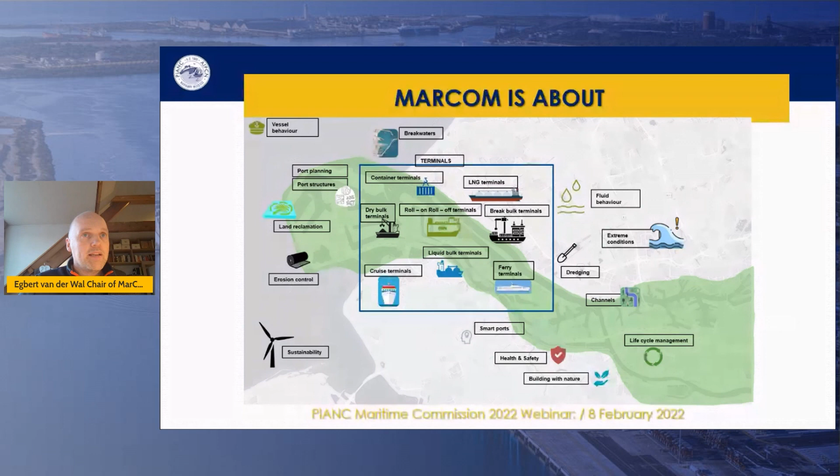And that's also something that we are working on from the Maritime Commission itself, but also with the members of MarCom. We have around 55 members from 25 countries across the globe. What I feel most proud of is that the level of expertise, not only within the Maritime Commission itself but also within the working groups, is phenomenal. There are people working on tunnels in Norway, on huge reclamation projects, and everything in between.

MarCom cooperates a lot with other international organizations like IMO, the International Association for Ports and Harbors, but the newest one is OCIMF, with whom we share our knowledge, but they also give input into our new guidelines. I think that strengthens the cooperation but also ensures that everything that we make is fit for purpose.

If I then look a little bit back into the latest reports which we have made, it's about renewables and energy efficiency for maritime ports, the design principles for dry bulk marine terminals in 2019, ports on greenfield sites, berthing velocities, which Alfred is going to talk about, and the planning for automation of container terminals, which Ashebir is going to talk about.

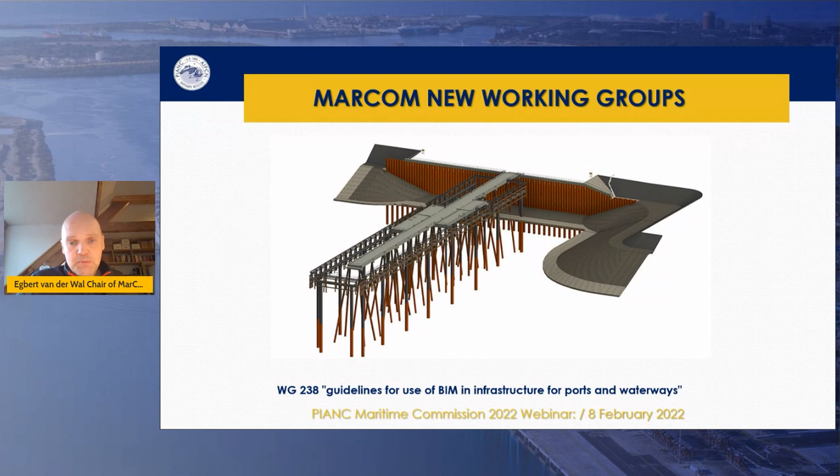The guidelines for the use of BIM, building information modeling, in infrastructure for ports and waterways - also something which is somewhat new, but also already existing. There are a lot of international guidelines available, but how to use that and what the gain is by using BIM in your projects, that's something we just kicked off now. I have very high hopes for this really nice report.

Mitigation of tsunami disasters in ports, also a topic which is still evolving, and we are trying to see if we can enhance our guidelines to give expert advice.

The one I'm very proud of, also because it's one of the working groups that was being done by our late colleague from Australia, is the guidance for ports in small island countries. This is the first guideline which we are not making only by ourselves, but including the World Bank and also the Asian Pacific Investment Fund on infrastructure - a really good opportunity to ensure that the smaller ports, small islands, can use our information.

Then the last thing I want to say before we kick off the rest is that we have two new topics coming on. So if you're interested in sharing your information, sharing your knowledge, it's always good to have a little bit of an idea of what's coming up.

The two things at the moment we are planning from the Maritime Commission: a guideline for the planning and implementation of shore power connections. There's a lot at the moment already existing in different forms, but we still see that it's a struggle to get the right kind of project and get it done swiftly.

What is happening in the port or container terminal industry? They've been trying continuously from the inception to optimize all the processes, to find what they do better in the future. This has been happening for a long time, especially as the waterfront land becomes less and less available. Consolidation and densification require a lot of processes, similar to industrial systems.

So that's what automation is. And with that, as you can see with our iPhones, technology has improved significantly. Equipment, computers, terminal operating systems significantly improved. So these two aligned and made it cost-effective for operators or ports to implement automation. But we always have to understand the initial cost of automation is high. There is some benefit though, sometimes significant: improved productivity, lower labor cost, lower operating cost, and greater degree of safety and reliability.

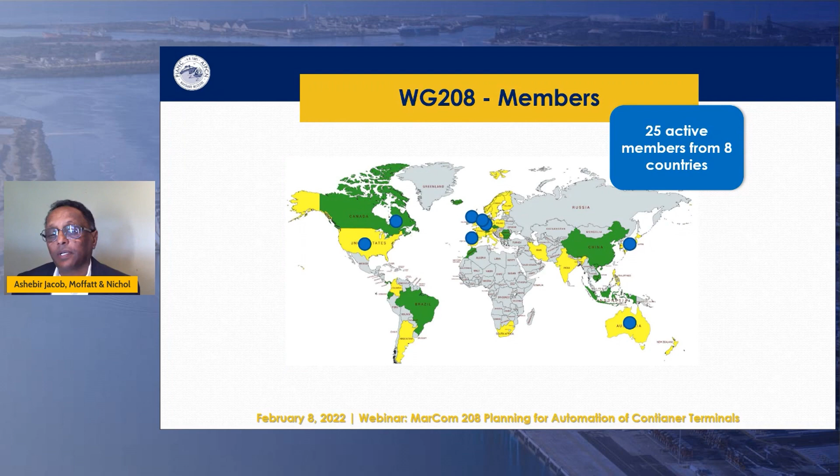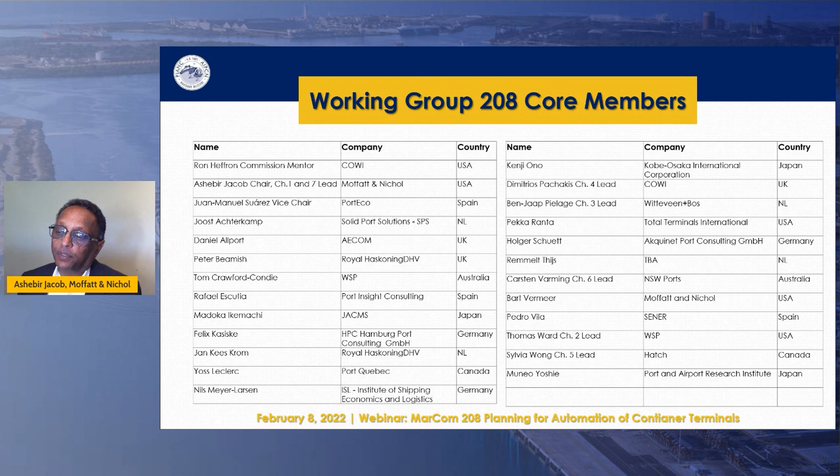The guideline focuses on the planning process of automated container terminals. In our team, we had 25 active, dedicated, smart, and experienced members from 8 countries. But it didn't stop there - we had support from the industry as well. Here are the names first for the Working Group 208. Please, when you see them, thank them. They didn't get a penny to do this. They are highly experienced, busy people, but they were dedicated in providing and sharing information based on their experience.

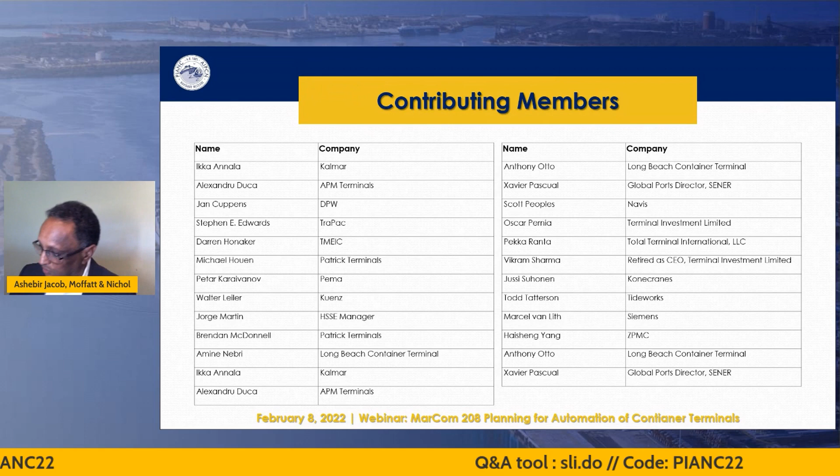Not only the core team, but we did get input from industry experts. Our goal was: if we publish this, it has to be acceptable, and we have to be able to get feedback if we're not doing it right from the industry - be it from the equipment side, automation, control systems, or TOS (terminal operating systems), terminal operators. Thank you for their contribution. We're comfortable that this is a good document.

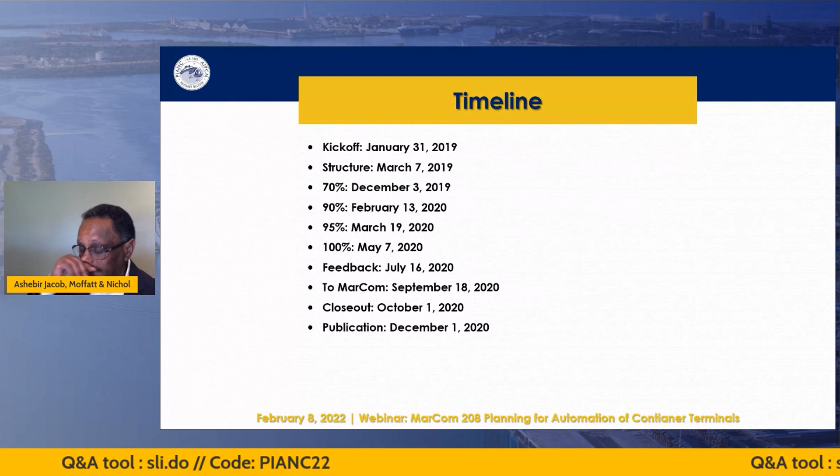And the reason I say they were really dedicated - it all happened during COVID shutdown. We had a few meetings before COVID, but mostly it was virtual. And imagine many different time zones - people were willing to get up at 2 a.m. in the morning, or stay up until 11 in the evening to attend these meetings and workshops, and were able to achieve this document quickly.

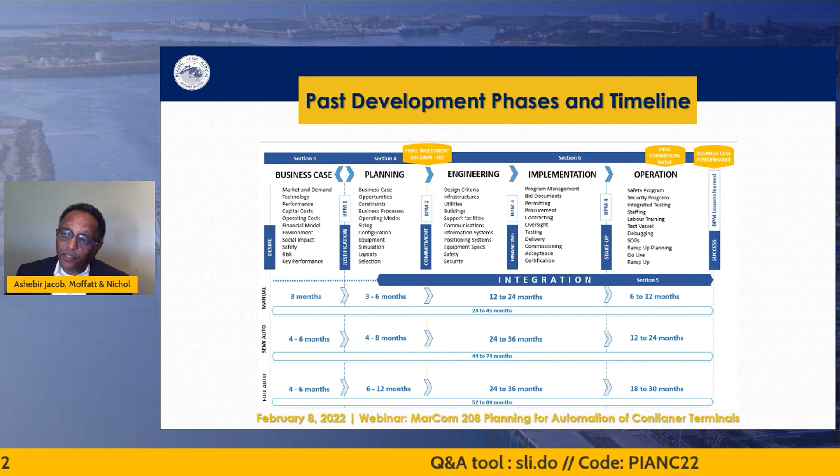So back to the document itself. The document defines the planning process in 6 or 7 major pieces. The first one is the business case - don't start planning until you define your business case. That is what tells you you've achieved a different level. Otherwise, if the business case is continuously changing, it has to be documented, and all the core team players have to understand it and know what they are implementing. So define it early, and then start the planning, continue to do the engineering, implementation, and operation. It goes even after operation, into continuous improvement.

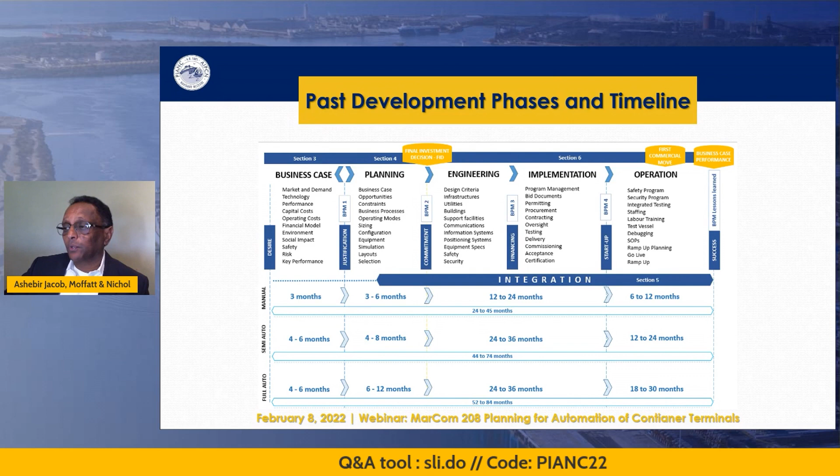But the key word here is integration. It starts from the beginning to the end, in an integrated way. You cannot do this in a silo - all the work has to be integrated from planning all the way to operation and continuous improvement.

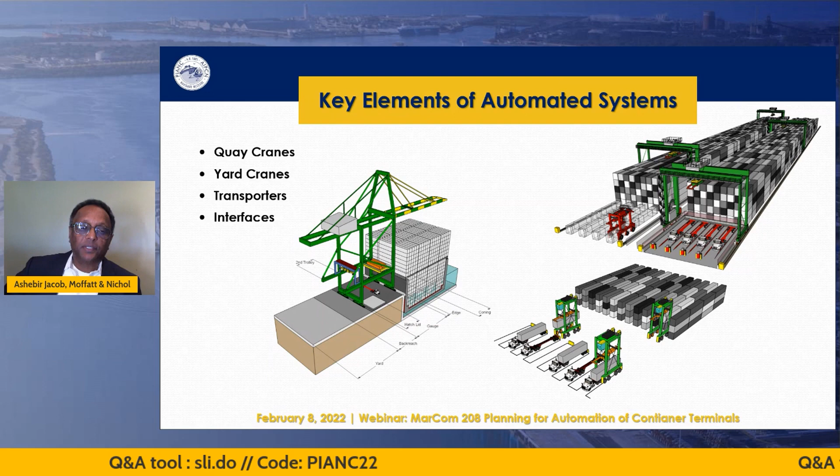So when we talk about automation, starting from the water side, we have the quay cranes, the horizontal transports, and the stacking cranes. I'll talk a little more in detail about each piece, but these are the pieces: receive and deliver to the water, receive and deliver to the gate and rail, and manage the stack and transport it from one system to another.

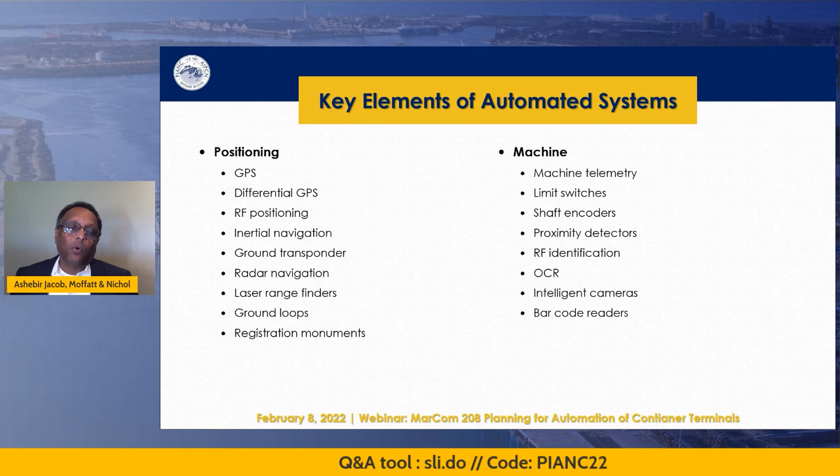But there are many other technologies that make it happen, be it GPS, or ground transponders. All this has to be there. Some of them are buried, some are in antennas, but all working together are what make an automated terminal function. So it's not only about the equipment, it is about the whole system working together.

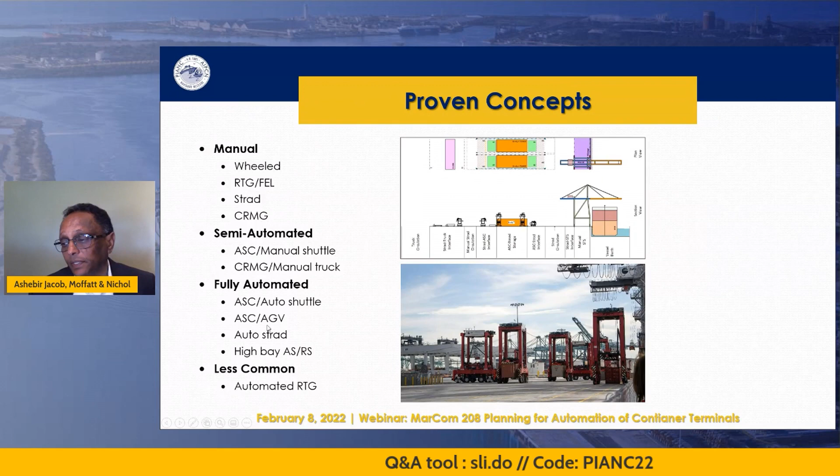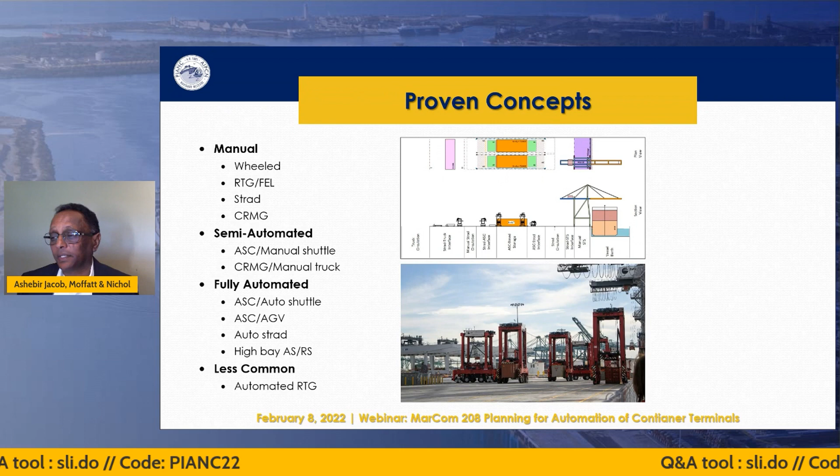Definitely the Autostrad is another machine that does transport and at the same time is used as stacking equipment. But the Autostrad is available both in auto and manned versions. Some companies are working hard to automate RTGs, but we haven't seen it yet in full service - so maybe someone will correct me later.

So always start with a business case. The business case starts with why are you building it, where is the market, where is the volume coming from, and how is it happening from day zero to year 20, 30, or 40, depending on what the design life is.

Then we go into the technology, the preferred technology, and what are we expecting in terms of productivity. What are we expecting in terms of transshipment - what percentage is it, is it 90% transshipment, or is it 50-50? All this has to be documented in a system so that it allows us to develop a system that works.

Most importantly, based on those, we have to know what our budget is in terms of capital cost, and what we're expecting in terms of OPEX or operational cost. We develop a financial model that can track the return on our investment. This is a living document, but it has to always be updated and have buy-in from owners, senior managers, and the core team implementing the system.

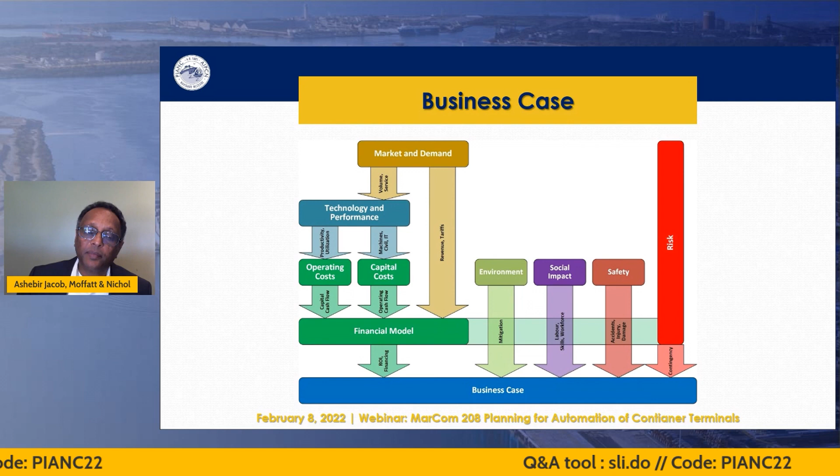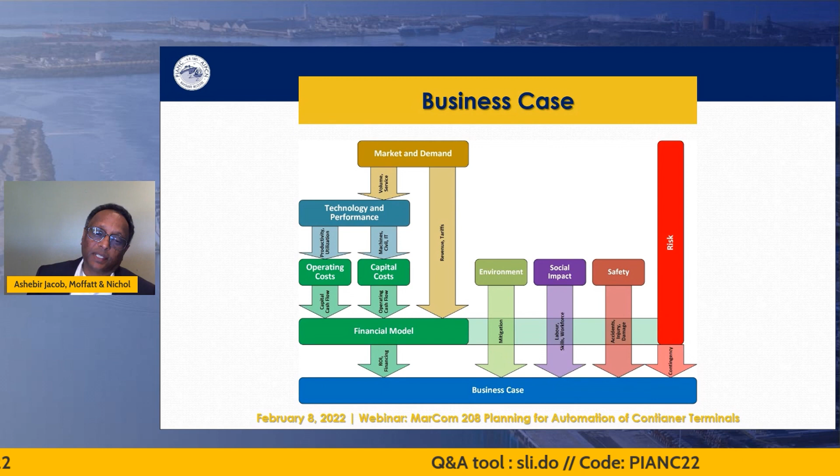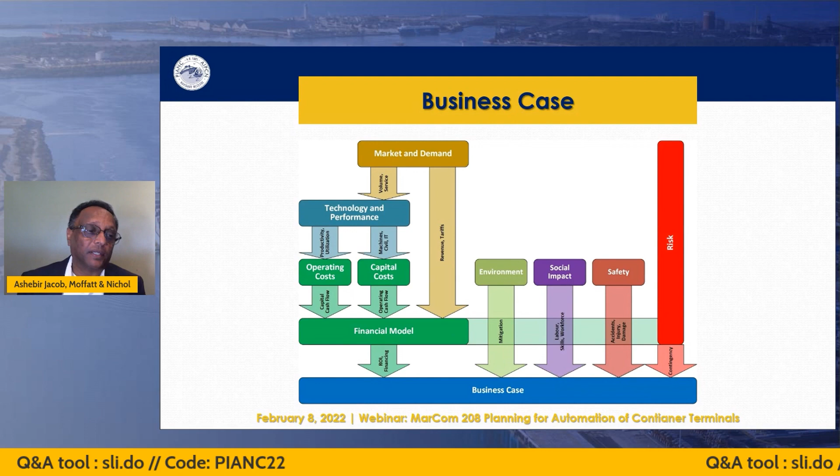But it's not only that - there are other drivers in the business case. We may be doing it because it's required to meet environmental requirements like zero emission, or for social impacts and safety - always assess your risk and come up with mitigation ahead of development. But sometimes automated terminals are developed for prestige or competition purposes. Those need to be defined as a business case for that specific terminal.

So the first thing we do in terminal planning is form a core team - this is really critical. At minimum, the core team should include a project director or manager responsible for all aspects of it, a member of operations, a member of equipment, a member of the infrastructure engineering team, finance, TOS, IT, and cyber security. All those are part of that core team, including a labor relations manager, because in many areas you have to comply with labor rules, and you have to understand the legal requirements and regulations. Having all those people working from beginning to end assures the success of the project.

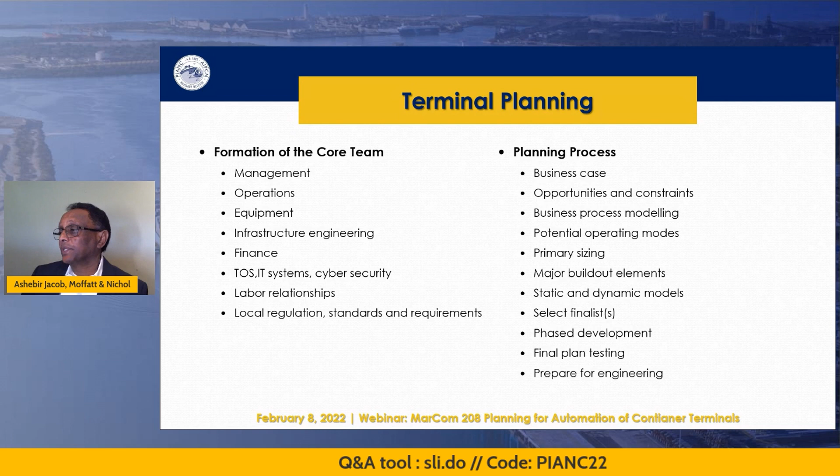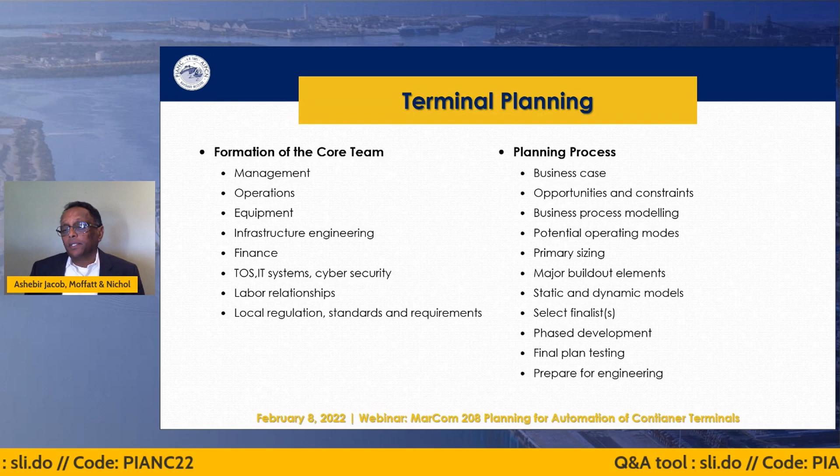In planning, we define the business case again, look at opportunities and constraints, look at the business, and develop a business process model. We look at potential operating modes - is it side-loaded, is it end-loaded, is it end-loaded parallel, is it a double cantilever? All of them have a purpose because of the shape of the terminal or the mix of transshipment, giving you a way of solving those problems and meeting your business case.

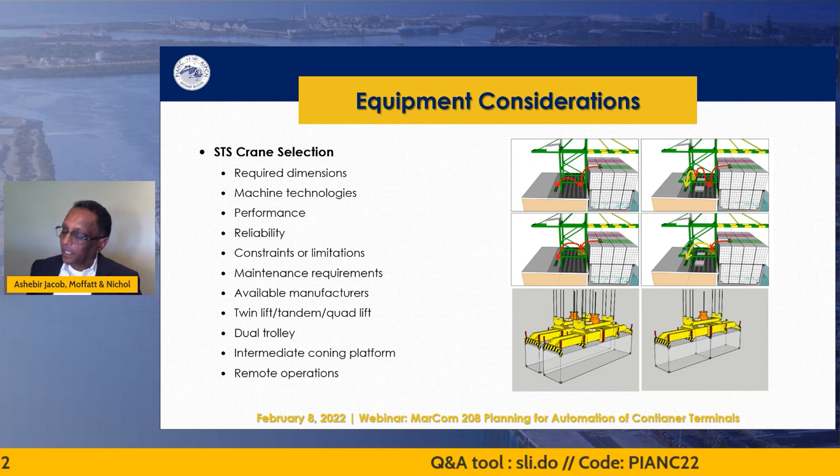So none of this equipment is off the shelf. Simply, STS used to be 100-foot gauge - you give them the outreach and backreach, and ZPMC will deliver. None of that is real anymore. It is highly technologically advanced and fit for that terminal's specific business case.

The performance specification has to be developed. Is it a single trolley, is it a double trolley, is it tandem or quad 20s? All those have to be defined. What is the span, what is the outreach, what is the height? Depending on the vessel design and the transfer to horizontal transport, so it is not off the shelf - please understand that.

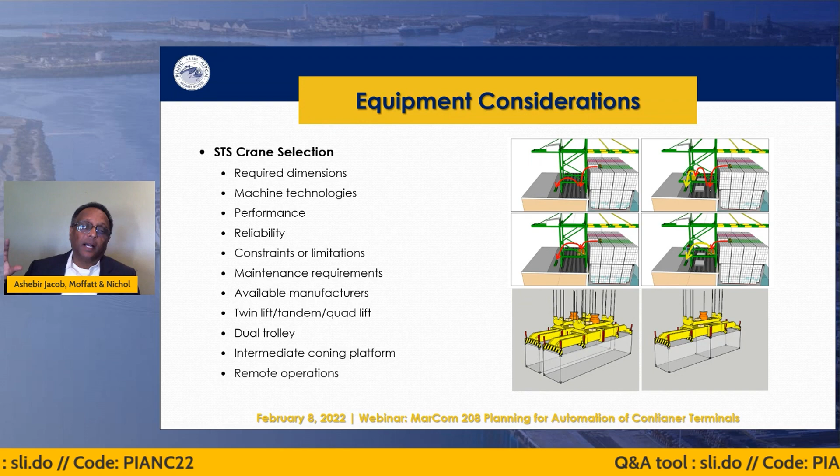Yard cranes - there are many yard cranes available. As I stated earlier, we have the ASC end-loaded. We have them parallel to the wharf, and perpendicular to the wharf, side-loaded. All those have been used and proven. We have horizontal transports that can interface with STS and ASCs, and we need to look at their reliability and performance. We have to develop a maneuvering space after selecting the equipment - that's why it's called integrated planning.

Based on the decision of what equipment we use, we have to develop appropriate space, and we assure this appropriate space by modeling it, creating a simulation model, a digital twin of the whole system, making sure we will achieve if we build it, because it is a really high cost.

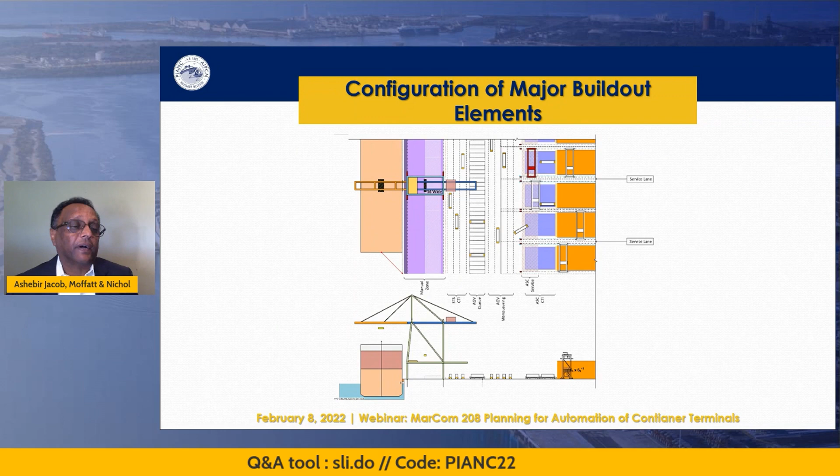We have to assure ourselves what we build will give us what we defined in our business case. Then even in the stacking area, the ASCs, we have to understand where it's going to be stacked, how it can be maintained safely. If we have two cranes, do we have a safe maintenance area so we can serve both ends using one crane? All this needs to be defined, drawn, and identified before we finally decide to buy the equipment and finalize the design.

So this is really important, and this is why we say it is an integrated planning all the way to delivery.

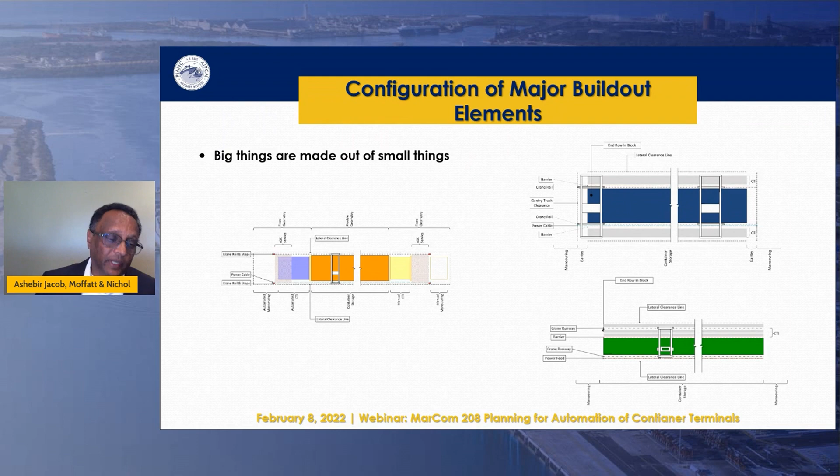Once we finish the planning, we look at other details. The most important is that we have to use the simulation tool, a digital twin of your facility, your sandbox that you can play with, and make sure it works. That is the closest, if done right, to building it. You don't want to build it and find all the problems. Therefore, you use a digital system to do that.

And then you can use emulation to make sure all the systems and technologies are integrated. You fool the systems by building it and thinking it is communicating with the real terminal facility, optimizing your tools, your control systems, all those. This digital twin emulation will stay there, and you can continue to use it as a training tool and others. So invest in it early on.

Phasing plans - you're not going to implement this in one shot. There are phases. And if it is a brownfield, it even becomes more complex and complicated. So understand those, mitigate those ahead of time.

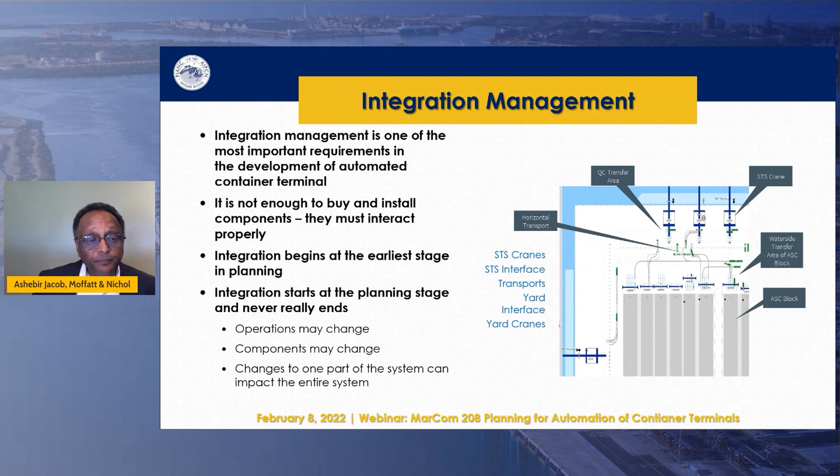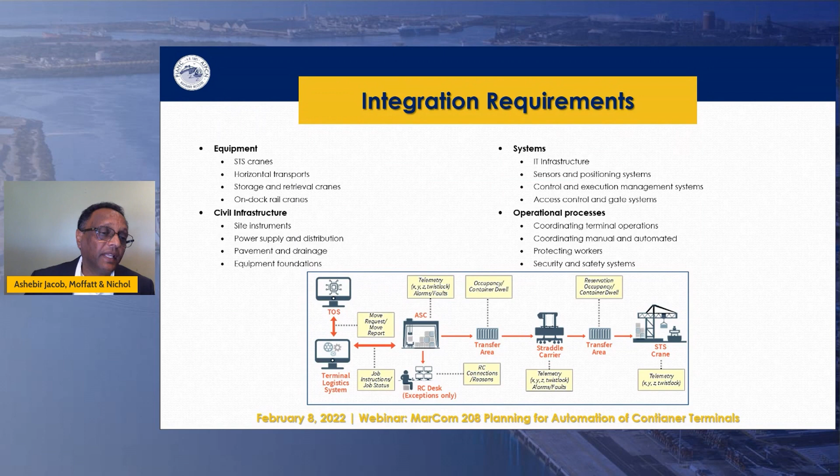So as you can see, there are so many systems that have to work together. You have removed the human brain, and some computers are taking over, running the terminal. These systems have to talk to each other precisely for all things to be done safely and efficiently. So think about it early on.

Then it goes into a detailed design. You have to design it - again, the importance of integration. If your equipment needs flat ground to store containers, flat crane rails, then you have to build it. The civil engineering has to accommodate operation, not operation trying to accommodate civil engineering. So you have to be able to drain it and still keep it flat.

And then you have to use the appropriate type of pavement in different areas, because where you have full automation and horizontal transport, getting there to do repair disrupts the operation significantly. So have a durable pavement system that requires almost zero maintenance.

This is just an example, but look at everything in a way that will allow the system to operate efficiently without disruption.

We have to understand the construction of this is completely different. We're not going to wait for the whole terminal to be fully constructed to bring equipment.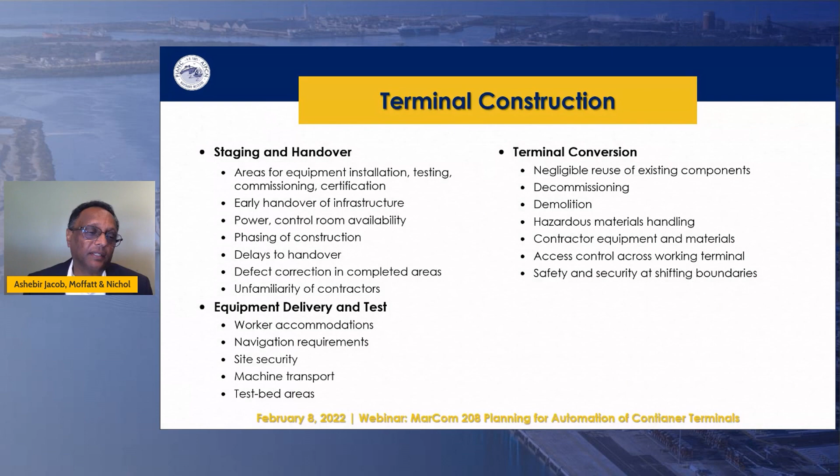Even in procurement, we have to think about all this, because what we specify for equipment or infrastructure has to be fully integrated with what we specify on both. And when we want them delivered, all those procurement documents have to be very integrated.

Finally, there are many ways of delivering these contracts. Multi-contract procurement, that's typical. But within that multi, there are certain things we can combine. There's this thing called turnkey, and some vendors try to promise this. My experience is this is bad, we are not there yet. Many of the problems in some new terminal developments come from believing the vendors, since they are owned by one, they can deliver. That's not correct. I'm sure many will disagree with me, but this is something we need to discuss more.

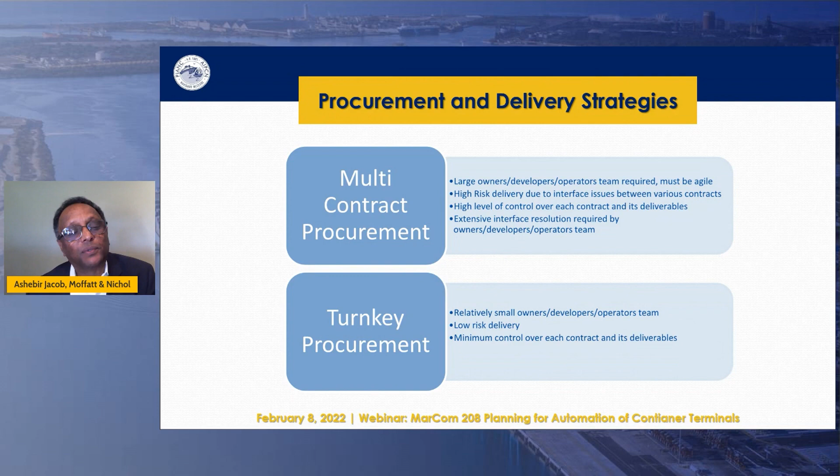So then, how do we hand over to operation? First, please understand after we go live, there is some time for ramp up. Do not forget that in your business case. The length of ramp up depends on how much planning we've done, how much testing we've done, what we've done previously helps us go from go-live into full business case productivity for the terminal.

But always remember, it's not robots running this. There are people who have to run it. Always remember to train them early on. Use the commissioning phase, the testing phase, to train your labor pool.

Always start to understand the business continuity. Think about the worst scenario and how you will mitigate that ahead of time.

And then definitely safety, and especially when you're dealing with technology, cybersecurity becomes important. Safety and security are key pieces, have experts in your team to look at those, because one casualty, one problem will shut down your terminal. But not only that, you want it to move safely, you need to protect your human resources. So make sure you go through independent reviewers looking at your safety system, especially where there are man and machine interfaces.

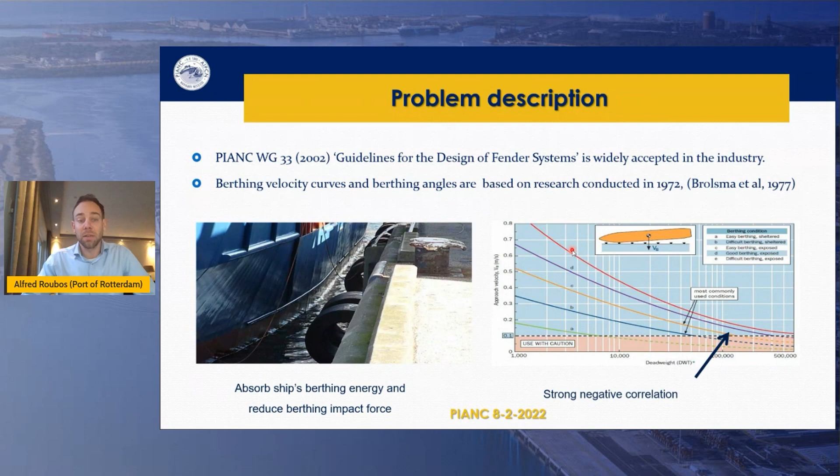It's also influenced by the navigation conditions. This line A represents very sheltered conditions, such as in Port of Rotterdam, whereas this is more exposed conditions subject to big waves and currents. Professor Ueda from Japan already showed that about 85% of the uncertainty in the berthing velocity largely influences the uncertainty in the kinetic energy, also because the velocity is squared. So this is one of the most important design variables in fender design.

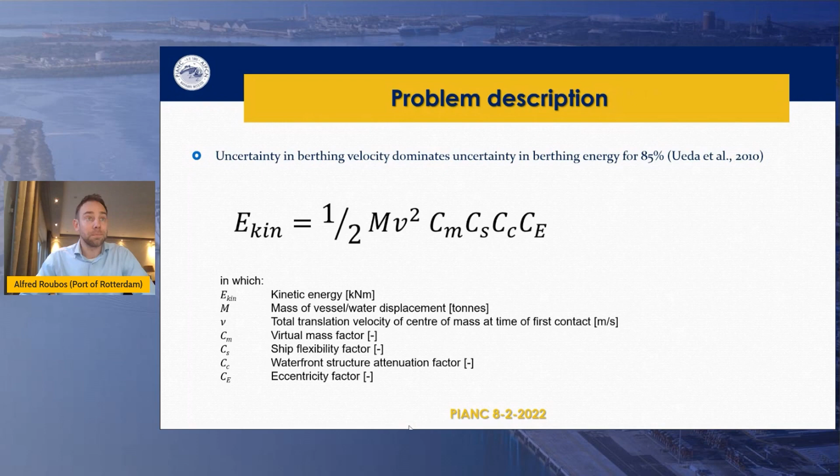That's the reason why PIANC 145 was tasked to collect data on berthing velocity, because we had a lack of data for about 45 years. Ships like the Ever Given are not included in the data set used during the 70s. So we collected a great deal of data, more than 2,000 berthing records from all over the world. 14 different ports in 7 different countries provided us with data, and our working group mainly focused on the data of the larger seagoing vessels.

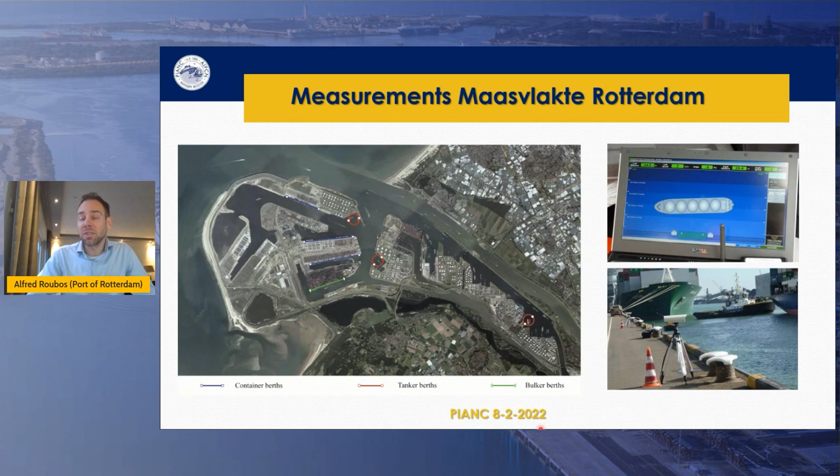Personally, I looked mainly into the data of the northwest part of Europe - Rotterdam, Wilhelmshaven, and Bremerhaven. You see a picture of the port of Rotterdam. We sent a student into the port with 2 mobile lasers, and he was basically shooting at the parallel body length of the vessel. During the stormy season in 2011, we collected 300 measurements of the big container vessels in the port. But that was the easiest part of the analysis.

We were also interested in what aspects influence the berthing velocity. So we made a big database, including wave conditions, currents, type of fenders, type of marine structures, occupancy of the berth, whether tugs were used or not, type of thrusters, whether the thrusters were used - to check what variables influence the berthing velocity.

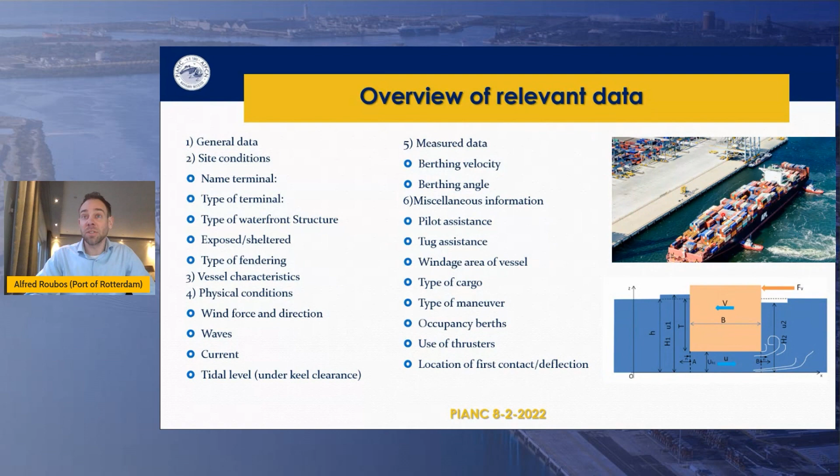Typically in Rotterdam you see this type of approach: the vessel is stopped like 30 or 20 meters in front of the fenders, and then it's gently pushed towards the marine structure. So a very controlled parallel landing procedure.

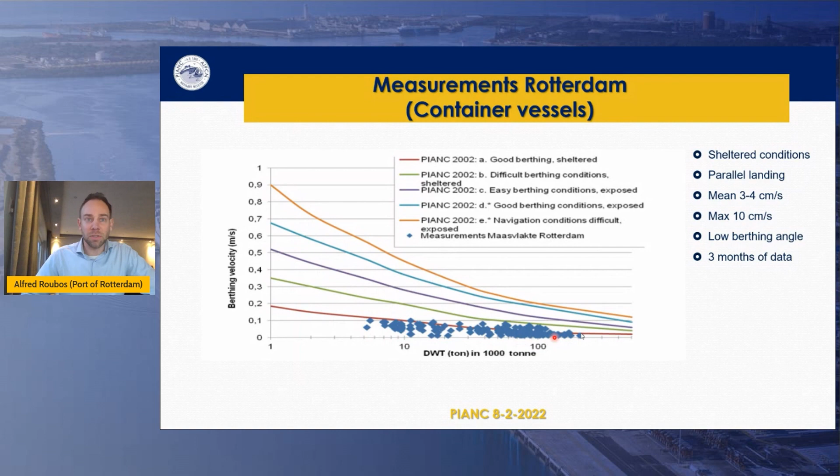You see the data collected in Rotterdam during the 3 months within the stormy season. The correlation is a little bit lower compared to vessel size, compared to the PIANC guidelines. Conditions in Rotterdam are quite sheltered. Mean velocities were about 3 to 4 centimeters per second, and the maximum velocity measured was about 10 centimeters per second. We also measured quite low berthing angles. This is only 3 months of data. So the Ever Given, for instance, the big container vessels are in this range, then we have the post-Panamax, new Panamax vessels, and the small feeders and coasters are in this area - so the small container vessels, and here you have the big container vessels.

We used this data set within 145, and then we did all kinds of statistical analysis, and predicted already higher values than 20 centimeters per second. Because the Port of Bremerhaven is still measuring the velocities, they provided us with a new data set in 2018, and this data set already included a higher velocity of 26 centimeters per second. I'll show it in a moment. It's also worth mentioning that the berthing angle at the moment of impact in Bremerhaven was generally always between 0 and 1 degree - I'll come back to that later on. So now we used about 8 years of data, and I think right now they have about 11 years of data of the berthing velocity in Bremerhaven - a very big data set.

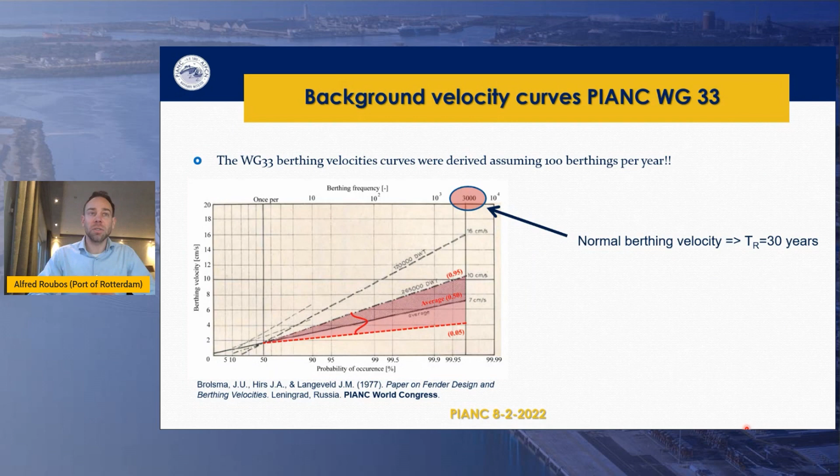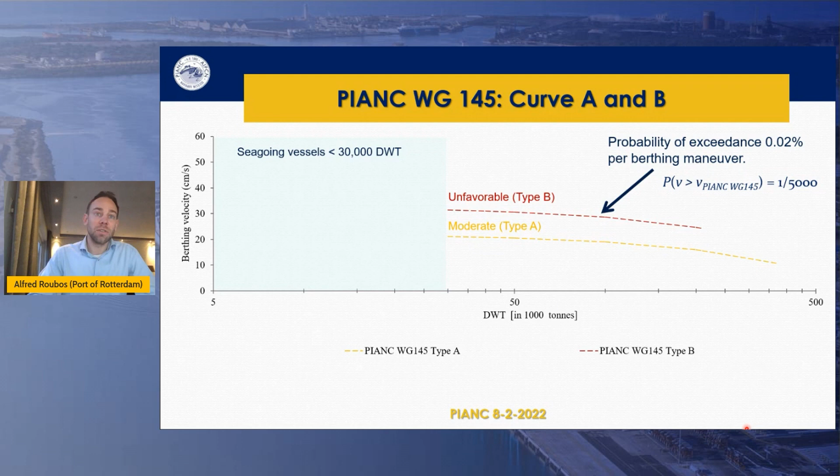Joko Brolsma, who developed the guidelines in the existing PIANC guideline, also did some extreme value theory. We're not looking for the mean berthing velocity, we're looking for extreme berthing velocities which might occur during the service life. So we did a similar analysis, also using extreme value theory in the PIANC committee, and two types of data sets were developed. In the guidelines, called type A and type B data, which basically represent moderate and unfavorable navigation conditions. These curves have a kind of probability of exceedance, so these are extreme velocities, and you see the data set below the curves.

We had a big discussion going on - is the data analysis okay? Because first, during 2014, we didn't measure these extreme velocities, but in the bigger data set of Bremerhaven you can actually see that one of the biggest container vessels in the world, one of the Maersk E-class container vessels, actually berthed with 26 centimeters per second - much higher than the values presently in use. But this gives us much more confidence about the data analysis that was performed, and that these values do occur in practice.

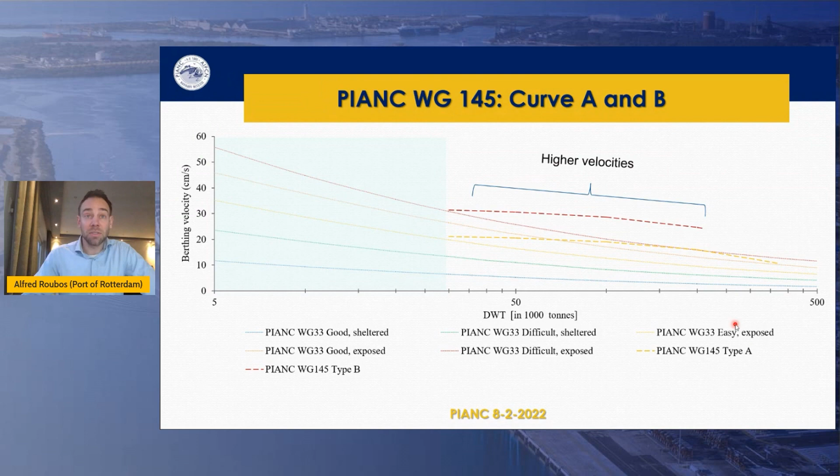So we found a bit higher velocities compared to the velocities that are currently in the guideline, especially for the larger seagoing vessels. And this will introduce a lot of discussion, so I'll come back to that later.

But first, let me summarize the main findings of our working group. We didn't find this strong relation between vessel size and berthing velocity, as was proposed in the previous working group. And we didn't find any evidence that berthing velocity is directly influenced by the type of marine structure, type of fender, or underkeel clearance. We didn't see a relation with the number of tugs.

No direct relation with environmental factors such as wind loads acting on the vessel, or currents. And the main reason why we didn't find these correlations is because they changed the berthing policy. So the pilots, for instance, order an extra tug when conditions get worse, and maybe sailing through the port channels is more critical than the final landing procedure. And then they have probably additional capacity left, so they are more in control.

So during stormy conditions, we sometimes saw lower velocities compared to normal daily conditions. That's because the pilots and the captains are more aware of the extreme conditions, for instance, and they take that into account in the berthing policy.

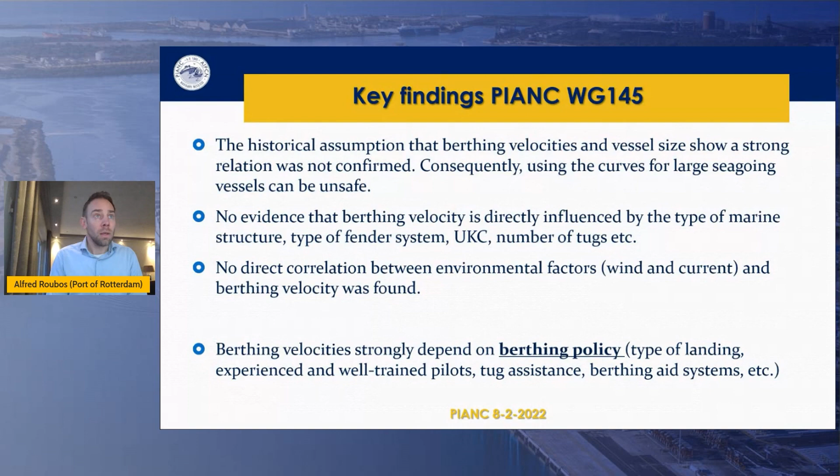So from PIANC MarCom, they were asking, well, these high velocities - is there a trend break, or do we need to double the fender size? We added a disclaimer to the Working Group 145 report, saying please be careful using the higher velocities in combination with the existing PIANC guideline, because we also have a lot of new insight that needs to be included in the new PIANC working group we are working on right now, the Working Group 211.

I'll discuss some new insights with you today, and we can discuss it further within the breakout sessions. So at first, we recommend using local or site-specific information rather than these general curves in the PIANC guideline. And if you have a berthing aid system or a shore-based docking system, maybe there are berthing speed limits which you can take into account in the design.

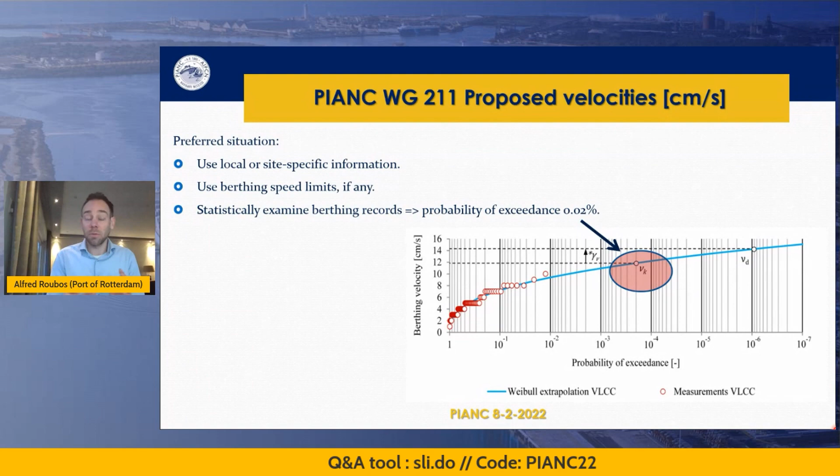Or if you have a big data set like Rotterdam, Bremerhaven, and other ports in Japan, then you can use this data to determine your own berthing velocity. But there are, of course, a lot of situations where you don't have data available or local information. Then we recommend in the PIANC guideline - it's just a conceptual table - we recommend to use these values.

So in contrast to PIANC Working Group 145, we added an additional column with recommendations for berthing velocity for very favorable navigation conditions. And these recommendations are based on the type A and type B berths that were presented before. But then we still end up with these high velocities for the larger seagoing vessels, and this might lead to bigger fenders.

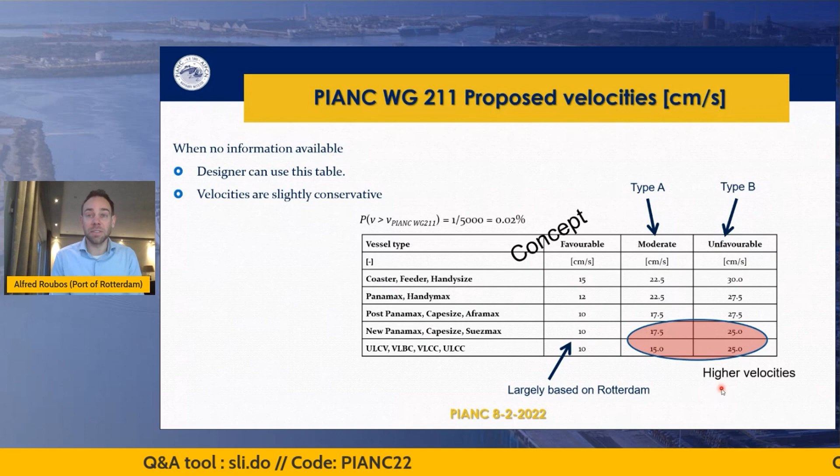But there are some things that we need to take into account before we conclude that. We also looked into the reliability of the fender system by performing a full probabilistic assessment within Delft University, to check what are the variables that influence the reliability of the fenders. I don't think I have time to discuss it in detail, but I will highlight some of the things that we found.

Of course, when you are designing a berth, this can facilitate small and large vessels, or empty or fully laden vessels. So there could be a variation in the displacement tonnage of the vessel, which can be taken into account in the reliability analysis.

Another thing we found is that recommendations for berthing frequency are lacking in the existing guideline. So some berths have only one or two vessels per year, whereas, for instance, public ferry terminals in Australia have 25,000 vessels per year.

That's completely different compared to what Brolsma assumed in the velocity curves in the existing guideline. So you can change the berthing frequency if you want, and this can really influence the safety factors we need to include in the guideline.

And also, if pilots are on board, then the probability that a high velocity will occur is much lower. So pilots generally have a positive impact on fender design.

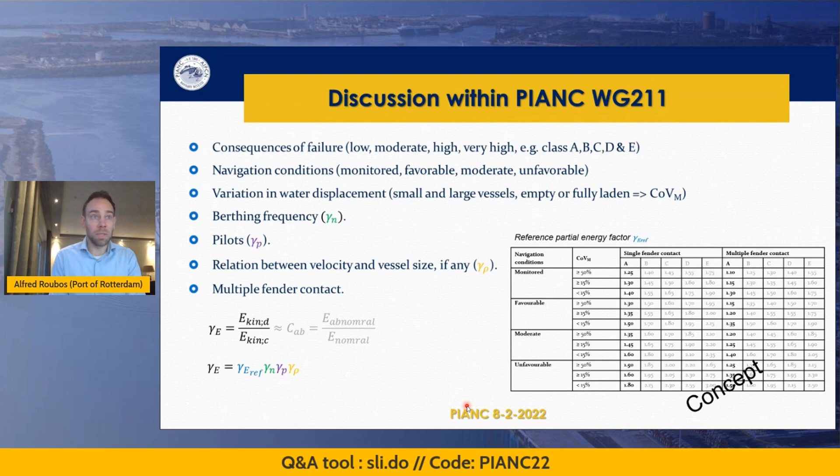So generally we design for single fender contact at the moment. So one fender absorbs all the energy, and then the berthing angle is not so relevant. So all the uncertainty within the design of the fenders is related to the uncertainty in the berthing velocity.

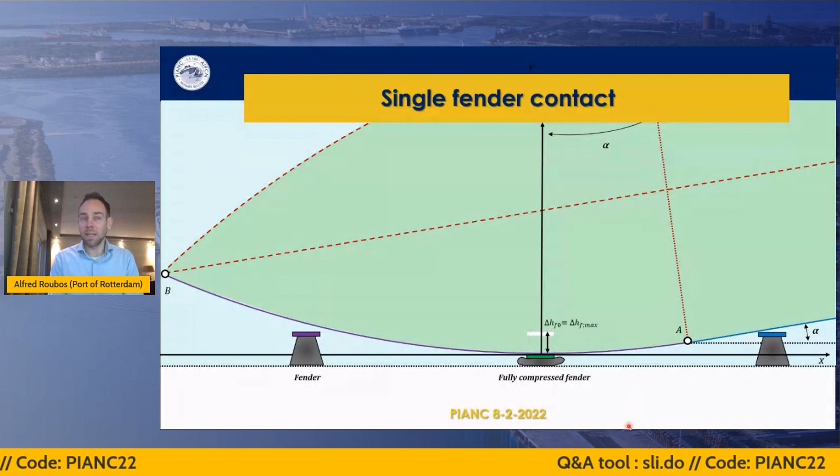But as soon as you change the fender pitch a bit, so you add more fenders or bigger vessels are there, then the uncertainty in the berthing angle will play a major role also. So then the probability that a high velocity occurs at the same time with a high berthing angle is less likely to occur. So we can take into account this effect.

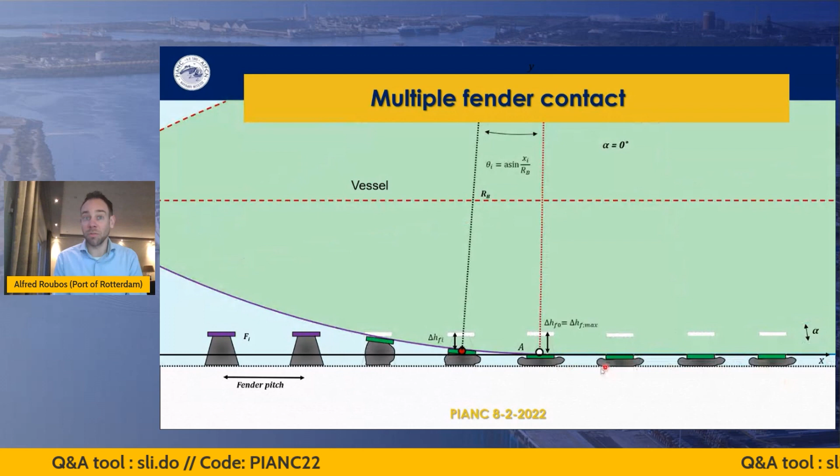So you can see in here, if you change the berthing angle a bit, if the berthing angle is 0 degrees, basically all the fenders are compressed at the parallel body length of the vessel, so they all contribute. For low berthing angles, much more fenders contribute in absorbing the berthing energy.

And that's exactly why we don't see damage at the moment in Bremerhaven. So the velocity is much higher than the velocity that was taken into account in design. But the berthing velocity, the berthing angle that was measured was way lower. I think they made a design with 5 degrees, but in general, we have 2,000 berthing records, and most of the records are far below 1 degree.

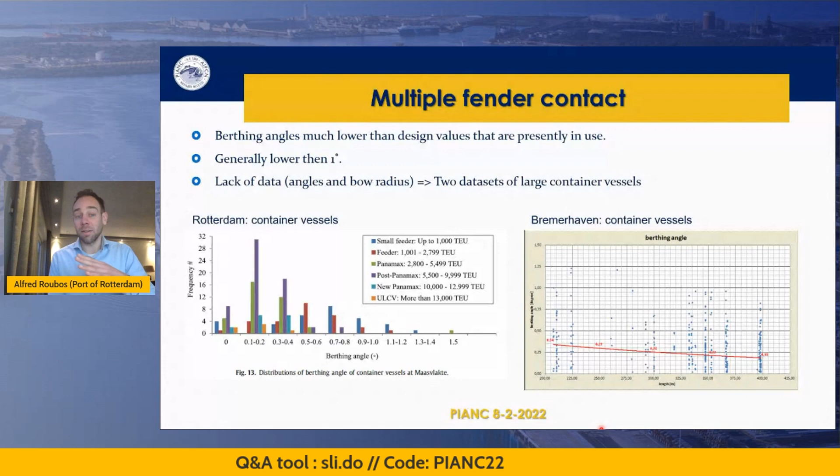And that's something we don't take into account. Higher values than 2 degrees are not likely to occur, because then you will cause damage to the cranes which are installed on the quay walls for the container terminals, for instance.

And also the data set in Rotterdam shows a similar image, and the same was in Japan, that berthing angles are much lower than what we take into account in the design. However, we still have a lack of data on berthing angles. And of course, there's also uncertainty in the shape of the vessel, the bow radius of the vessel, which can largely influence the outcome of the analysis.

There are some other things we are working on within the committee, like vessel characteristics, the mooring loads. We have still an ongoing discussion about the allowable hull loading, the hull pressure criterion, new insights in panel design. Of course, we are going to provide more uniform recommendations for fender testing, which can influence the durability, and sustainability and recycling will be included in the new guideline.

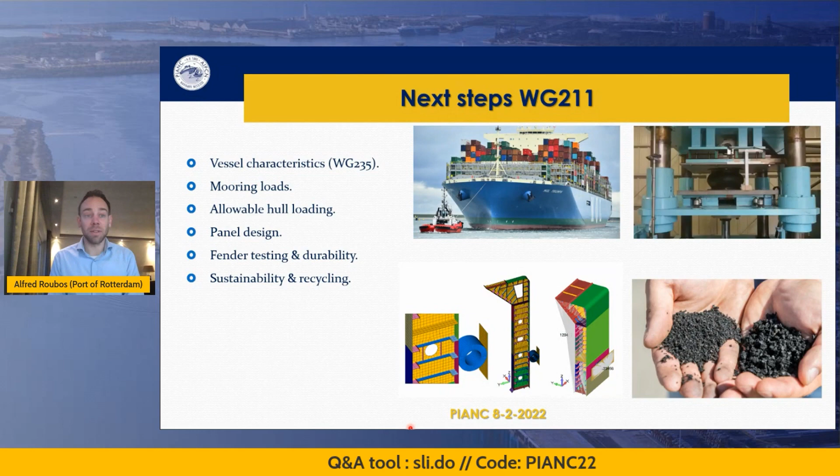I think we have more time in the breakout sessions to discuss these topics, but just to give an idea about the progress of the working group.

Finally, I think it's good to mention, to share some of my experience within participating in working groups. My first working group started in 2010. Also, as a young professional, you have the opportunity to collaborate with all the experts in the industry. So that was a very nice experience. So I would encourage all young professionals to participate as well.

I use the knowledge gap. So we have a lot of great discussions within the committees. I use it to determine knowledge gaps, and we can use that as input for new research.

Of course, you have meetings in different countries, so you have the opportunity to travel a bit. And we also have a lot of online meetings. That works fine, but maybe the process will be a bit longer if you have a lot of online meetings and you don't know each other.

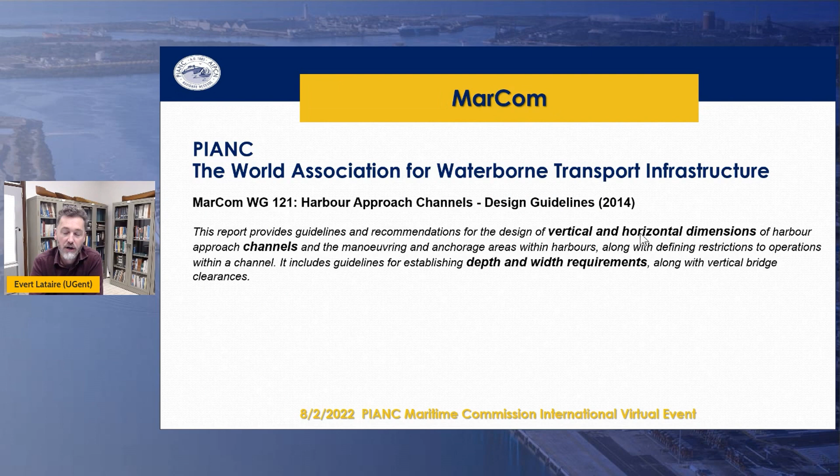Thank you, Babak, for the nice introduction, and hello everybody all around the world. I would like to look mainly at the hydrodynamics involved in the Ever Given incident earlier this year. It fits into MarCom Working Group 121 on harbor approach channels and design guidelines.

As mentioned by Babak, I'm head of the Maritime Technology Division of Ghent University in Belgium. Basically we work on everything that floats, from aquaculture, seaweed and mussels in waves and current, looking at the forces involved, to floating PV panels, even load-bearing glass on mega yachts. We create our own visualizations of the water surface for simulations, and we have an open source code on hydrofoils to study their dynamic stability.

But our real niche is slightly different from these topics, and that lies within ships maneuvering in shallow and confined water. We have a knowledge center for this, founded in 2008, though the expertise and research on the topic goes back to the 1980s. There are two partners in this knowledge center: my research group at Ghent University, and Flanders Hydraulics Research, also located in Belgium. It's within this knowledge center that there is a link to the Ever Given incident.

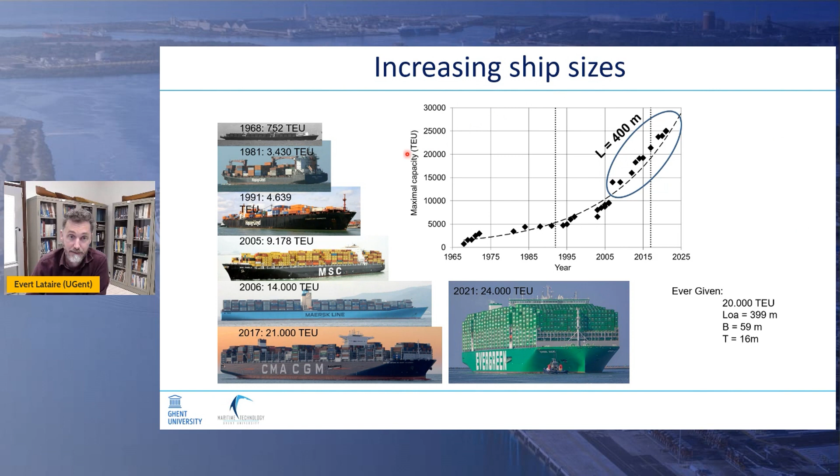But if we then move with the same ship to more shallow water, for example at 20% UKC, the gap under the ship gets more narrow, and we do exactly the same thing. Same speed, same rudder, same propeller rate, and we make a turn, and that turning circle will increase significantly. If we then move to even more shallow water, like 10% UKC, and to give you an idea, this happens in reality, in Belgium and the Netherlands we have a canal where they sail at 8% UKC. If we look at the same effect, same forward speed, full rudder angle, and make a turn, we see that the diameter of the turning circle increases dramatically. It's 3 to 4 times more compared to the deep water case.

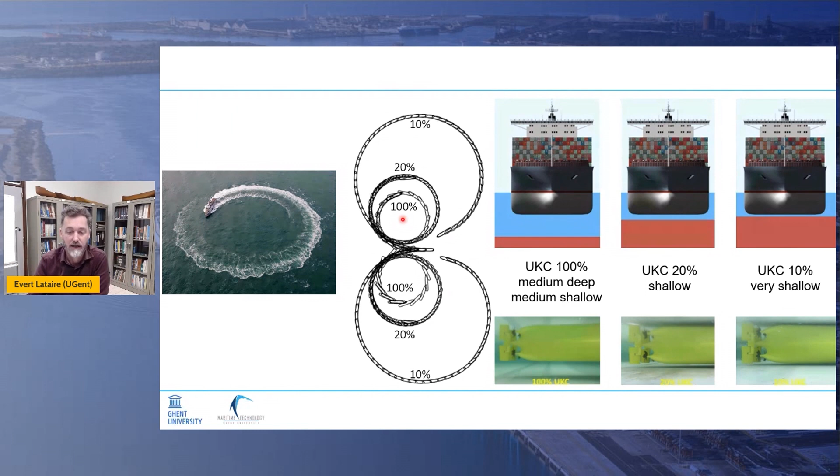In order to investigate this specific maneuvering behavior, we have different facilities. In Antwerp, Flanders Hydraulics Research has a rather modest-sized towing tank, 80 meters long, 7 meters wide, with a fully automated and unmanned carriage. We drag 4-meter ship models through the water in all kinds of conditions to find out the specific shallow water behavior of the vessel.

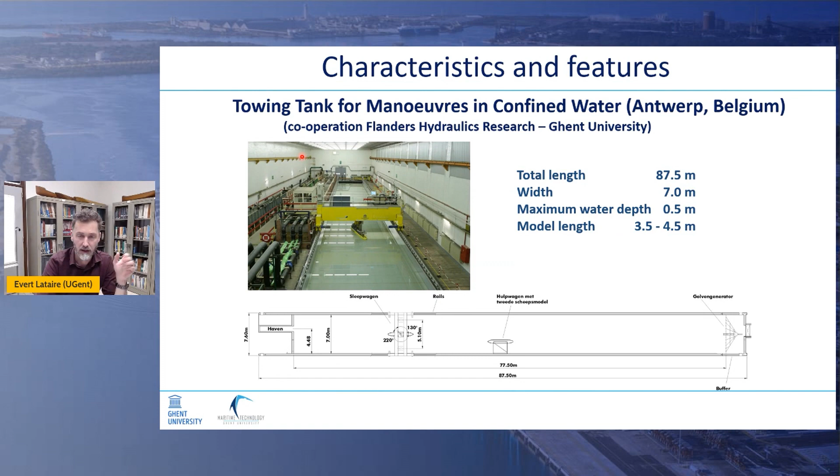That's Antwerp. We also have a new facility in Ostend, also owned by Flanders Hydraulics Research, with another shallow water towing tank, but in this case 175 meters long, 20 meters wide. Today we can do fully automated free running tests, and the carriage will be installed later this year. Next year we will be able to do captive model tests again, with bigger ship models, 8 meters, which we can drag through the water to look at the hydrodynamics involved.

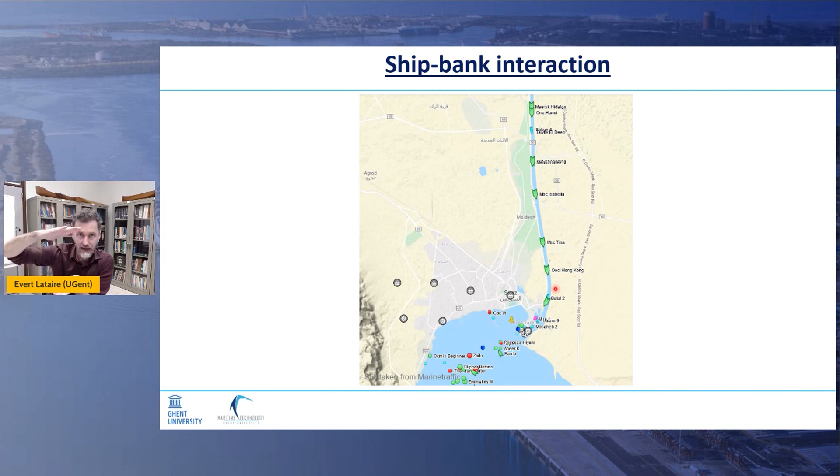If we move to Egypt, to the Suez Canal, then we see the following. This is not the situation of the Ever Given, but a common situation where we have the Suez Gulf, and then the Suez Canal towards the Mediterranean Sea. You can see it's oriented rather north-south, and at this location it's one-way traffic. So either there is a convoy sailing southbound, as in this example, or ships sailing northbound, as in the case of the Ever Given. What you also see is that the width of the canal is rather restricted, so we don't only have the vertical restriction on the Suez Canal, although it's relatively deep, we also have a horizontal restriction.

In order to investigate this specific phenomenon known as bank effects, over the past years we have done enormous amounts of model tests in Antwerp.

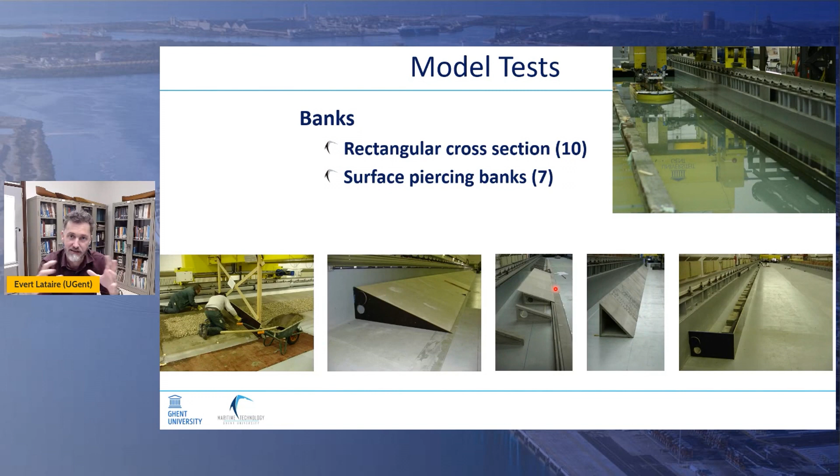Different rectangular cross sections were tested, different slopes of banks, vertical quay walls as in this example at a 1-to-1 scale, as in the Gaillard cut on the Panama Canal. Then we have slopes of 1-to-3, 1-to-7, and so on. A full range of geometries has been tested.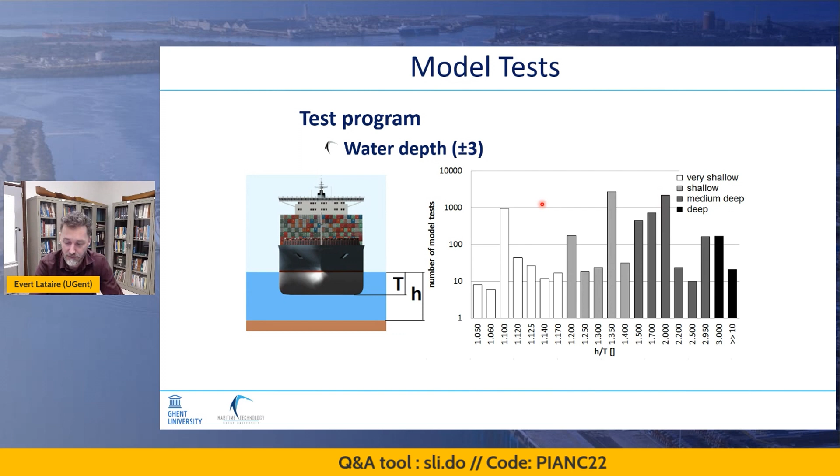We varied the distance to the bank as well. If we combine all this, we have more than 10,000 different model tests carried out only to find out what this specific bank effect, this hydrodynamic effect, means and what it does to your ship.

The real reason we do this is not for the research itself, but we want to create a mathematical model, which is then implemented into the simulators, and then we can use these simulators both for research purposes and training.

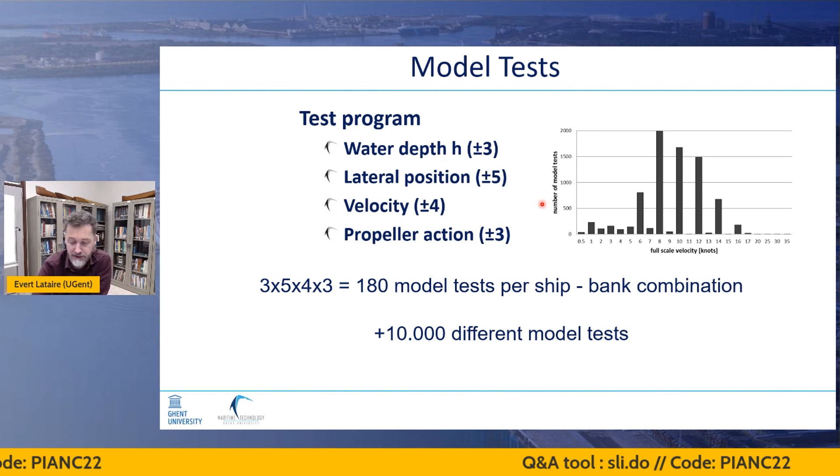Let's have a look at a video, more than 10 years old, of one of these tests. This is the bottom of our towing tank, this part. Then we installed a sloped bank, which is this thing. And the yellow red line here indicates the air-water interface.

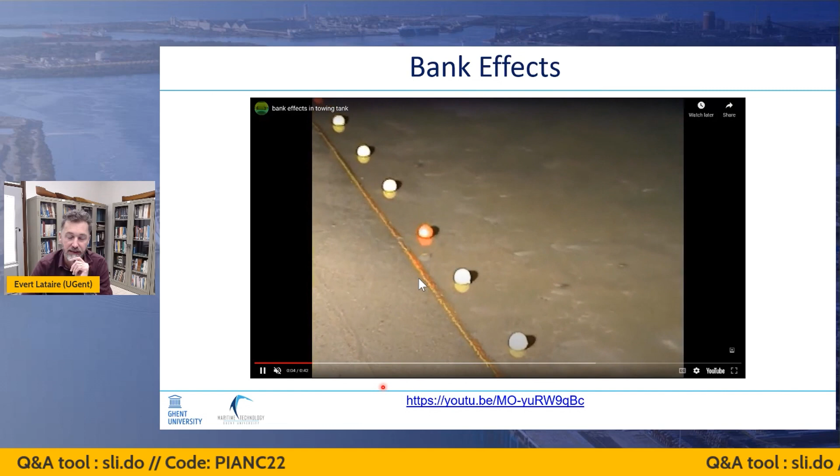So again, this is the dry part of the bank, and here there's a free surface. These balls are just spheres put there, not connected to anything. They just float. And here we can see the ship model passing by.

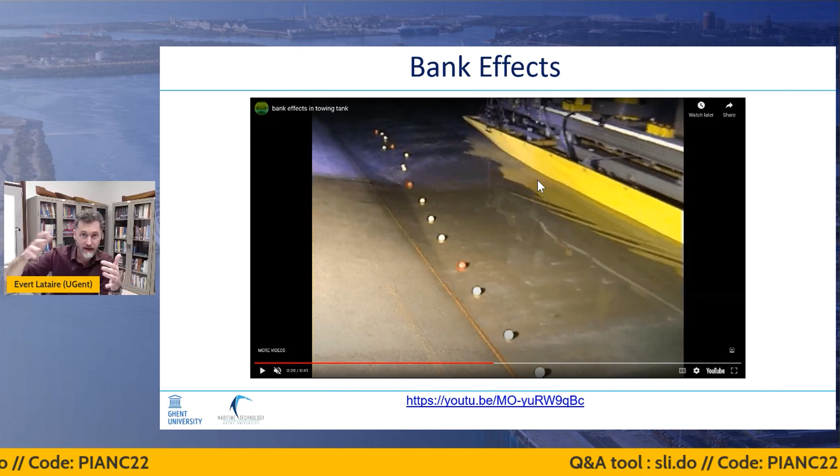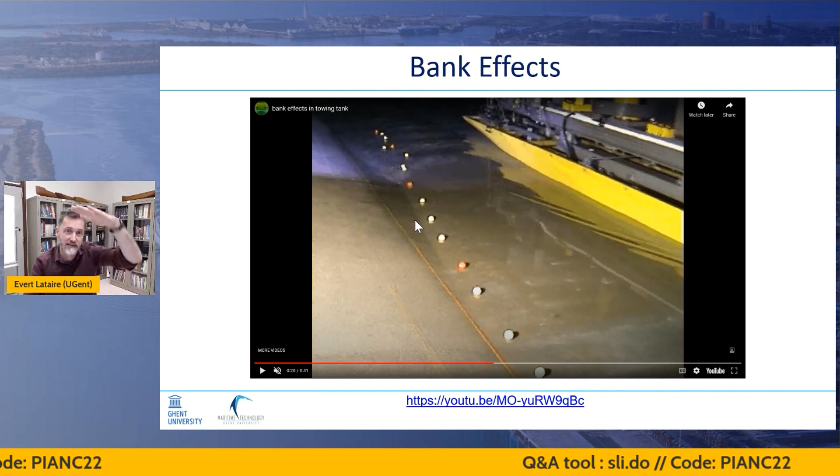What's quite important here is that the ship sails at a decent speed and it displaces water, but the water cannot go away. So it's squeezed between the bank and the ship. Because of that, there is a Bernoulli effect, meaning there is a pressure drop, so the water level drops. As you can see, this part which used to be there is only there now. So there's an enormous decrease of water level, and then there's a wave passing by.

If this doesn't seem realistic, a few years ago we got this video from Flushing, the Netherlands, of a ship whose company I don't want to disclose, and we see exactly the same effect. This wet sand is basically because of the depression between that ship and the bank, and then we see this wave passing by. Nobody got really injured in this video, though a few people got really wet.

So we see the same effect. This wave comes by at exactly the same speed as the ship. Again, it's the water between the ship and the bank which is really squeezed and accelerated. From the top view, we have a return flow on both sides, meaning the water flows in the opposite direction to which the ship sails. This return flow, because of the restriction between the ship and the bank, is higher, as in the water flows faster, and that higher speed results in a lower pressure.

So the ship as a whole gets attracted towards the seabed or bottom, known as squat or running sinkage. Typically, but not always, the ship is attracted towards the closest bank. That's why this effect is sometimes called bank suction. As we will see later on, sometimes it's a repulsion force as well.

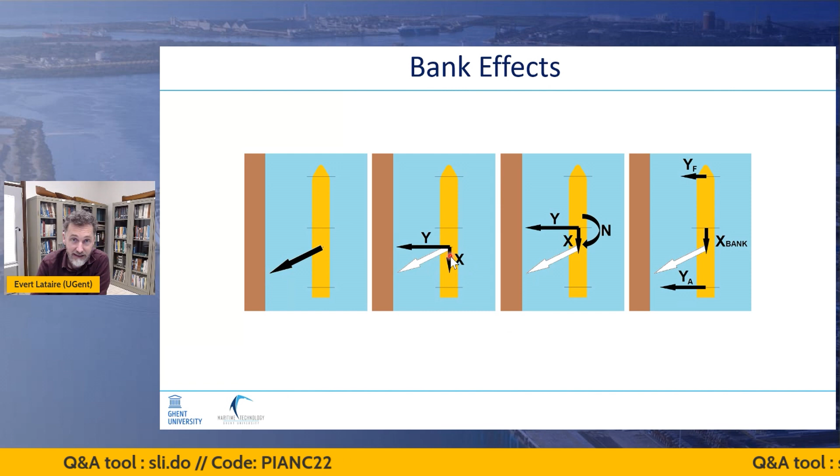We can decompose this force into a longitudinal and a lateral direction. This value x is basically an increase in resistance, while this is an attraction force. If we move it to the center of gravity, then we need to introduce a bow-away moment. So this ship gets slowed down, an increase in resistance, gets attracted towards the closest bank, and her bow is being pushed away by this closest bank.

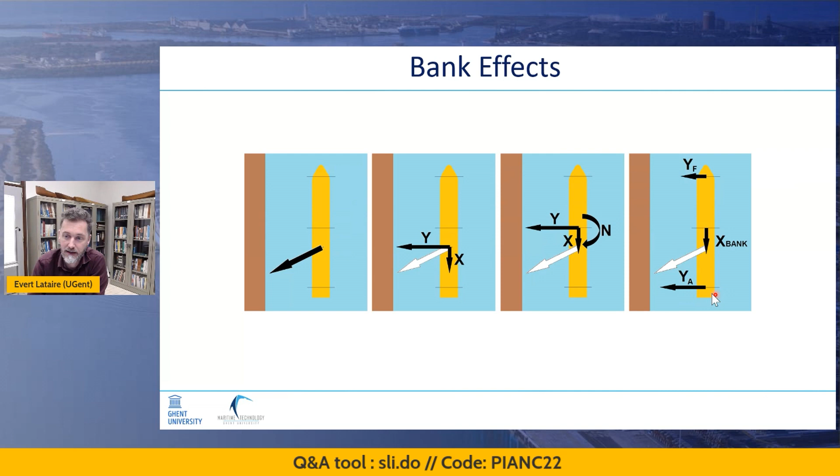If we then have a look at this split, all the black arrows combine to exactly the same thing: an attraction force at the aft and then a force at the fore. If we focus first on the attraction force at the aft, the rather obvious thing is that the closer we sail to the bank, the higher the magnitude of this attraction force.

The faster we sail, the higher the magnitude of this attraction force. At the fore, it's slightly different - it depends on the water depth. If we sail at a certain position in deep water, it's an attraction force, lower in magnitude than the attraction force at the aft. So that results in a bow-away moment as well.

But if we sail in very shallow water, then there is a pressure region between the ship and the bank, resulting in a high repulsion force. So in this situation, the ship gets even pushed away from the closest bank.

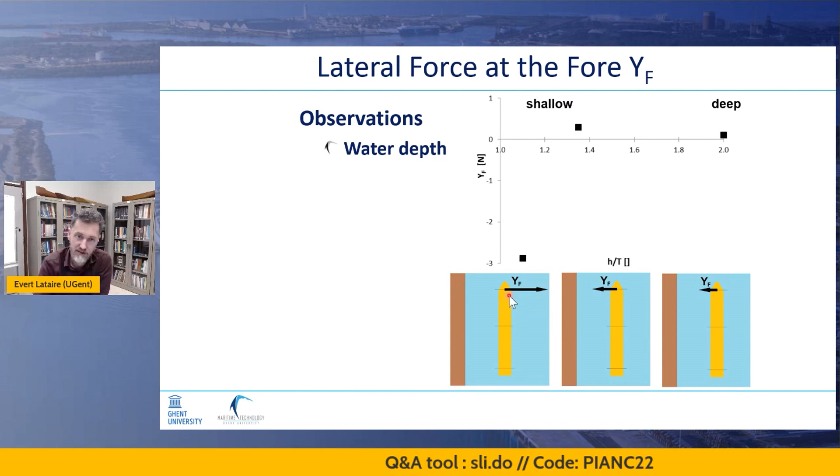Now, if we sum up the effect on the ship, it's as follows. If we sail close to a bank at decent speed, the ship might be attracted - in deep water cases, it's attracted towards the closest bank. It might be repulsion in more shallow water, but in all cases, it's a bow-away moment. This arrow is always the same - with the bow getting away from the closest bank, no matter whether it's deep or shallow water.

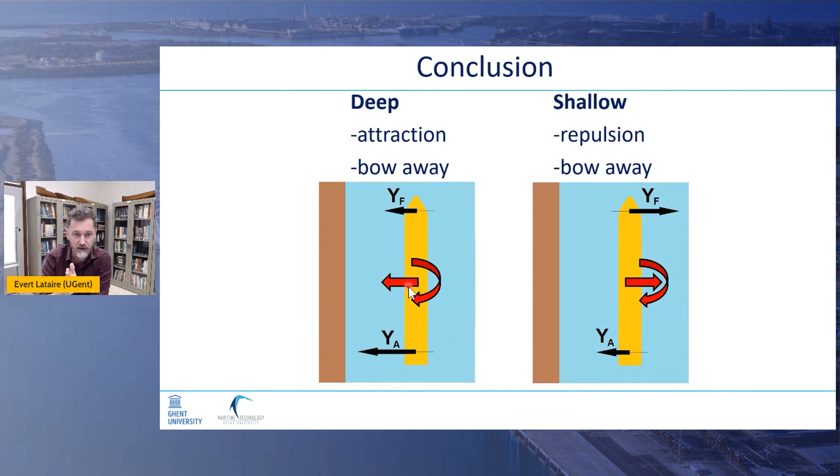This attraction force or sway force can be compensated by drift angle. The yaw moment needs to be compensated by rudder action. That's a rather important nuance.

Now, back to the Ever Given. In March of last year, the Ever Given crashed into the eastern bank of the Suez Canal.

But there's something quite specific I'd like to show you on the AIS data. First of all, the Ever Given was sailing northbound, so it's a northbound convoy.

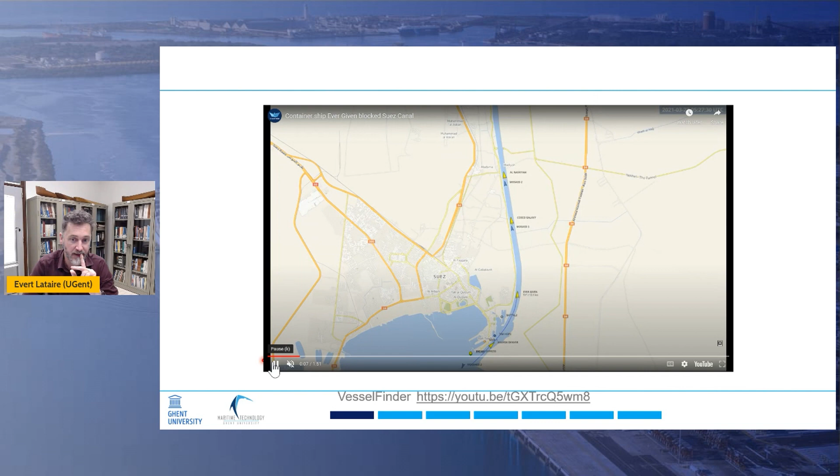Here we see the Ever Given on the canal. You can see it also a bit moving from left to right, so it's not sailing on the central line of the canal. It's slightly towards the east, at least as far as this AIS data is reliable. So in this situation, sailing close to the eastern bank, there might be an attraction force, there might be a repulsion force due to the bank effects, but there will be for sure a bow-away moment. That means the bow of the Ever Given in this location is pushed towards the west.

At the end, we have a propeller rate pushing our ship forward. So that combination brings your ship more to the west.

As we see here, at this point—actually a little bit before this moment—to me there is no discussion what's going on. At this location, the ship is still sailing more than 12 knots. It's sailing very close to the western bank. Again, bear in mind it's a trapezoidal cross-section, so the free water surface is much wider than that narrow deep water. So the ship is very close to the western bank, having a propeller rate pushing it forward, and having an enormous bow-away moment.

That combination results in a bow-away moment which is so big that it is impossible to be compensated by the rudder effects. At this speed, sailing so close to a bank cannot be compensated by anything. There is not a single rudder in the world which can compensate the bow-away moment induced at this point on the Ever Given.

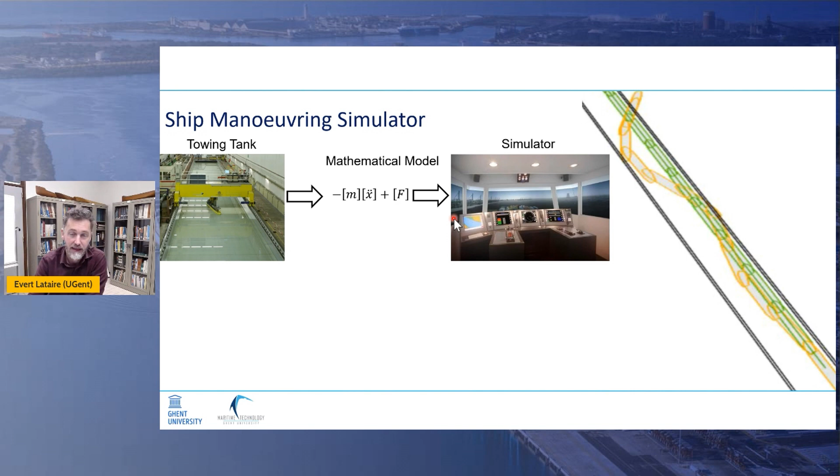And that's again at least the final position of the Ever Given, why it crashed into the bank. I cannot say, because I simply do not know, why they ended up so close to the western bank before the crash. It might be, and it seems also a bit because of previous bank effects, but it could also be very different reasons than that. For that, I lack the necessary information on the incident.

Which brings me to the end of this presentation. I have no idea if there is time now for questions. If not, then ask your questions in the breakout room later on.